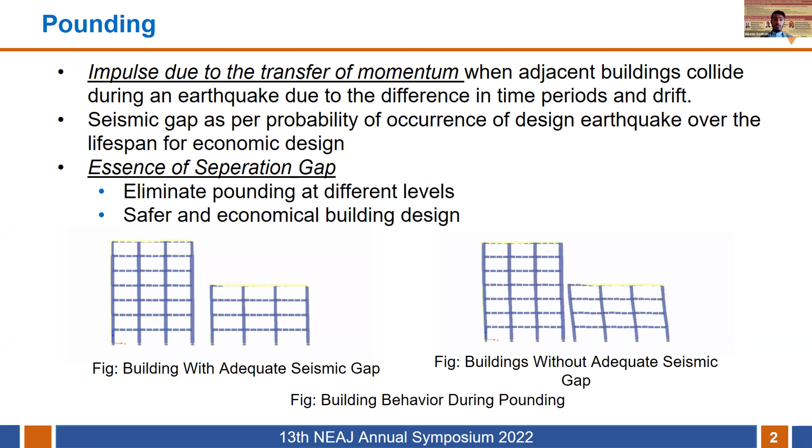On 25th April 2015, the Gorkha earthquake struck Nepal, especially damaging the central part of our country. Talking about the Kathmandu Valley, the basin amplification resulted in a higher time period, around 4.5 seconds along the east-west direction and 4.8 seconds in the north-south direction, especially damaging the tall or high-rise buildings, which are above 7 to 8 stories tall.

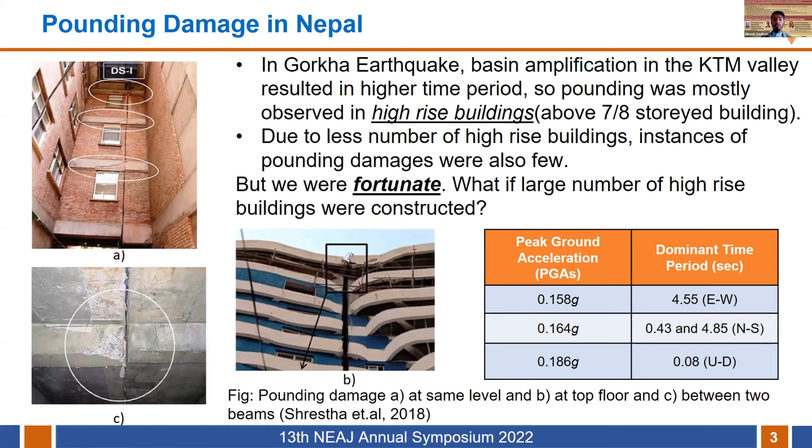But due to having fewer high-rise buildings in Nepal, the instances of pounding damage were also few. So you can say that we are fortunate in that case. But what if a large number of such buildings were constructed and a major earthquake struck? That could be a serious issue. Due to the lower damage of the Gorkha earthquake, it has further bolstered people's faith in existing building practices.

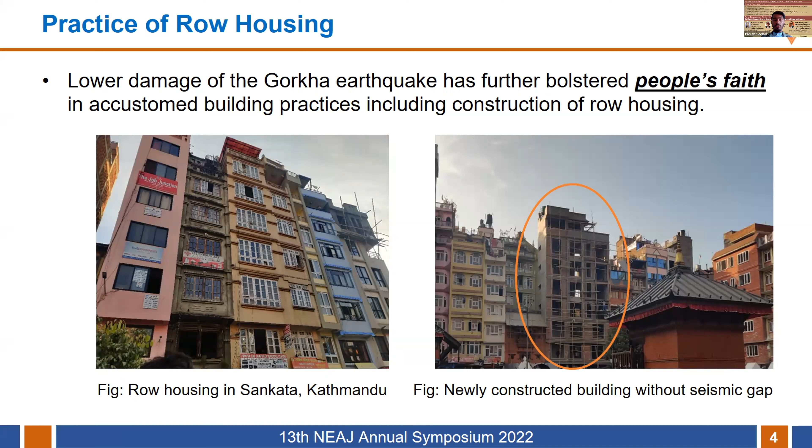Here in the figure, we can see that the row housing practices in Kathmandu Valley and even newly constructed buildings are not addressing seismic gap provisions in their construction. This may lead to severe damage and major consequences that we should consider. So the major question that arises is, will these row houses with such building practices in Nepal be able to sustain such damage should another occur?

To know the effects, we have selected 4 major earthquakes across the globe, including the Gorkha earthquake, whose PGA level varies from 0.177 for Gorkha earthquake to around 0.833 for Kobe earthquake. Taking these 4 major earthquakes, we are doing non-linear time history analysis, and the results will be presented in the further slides.

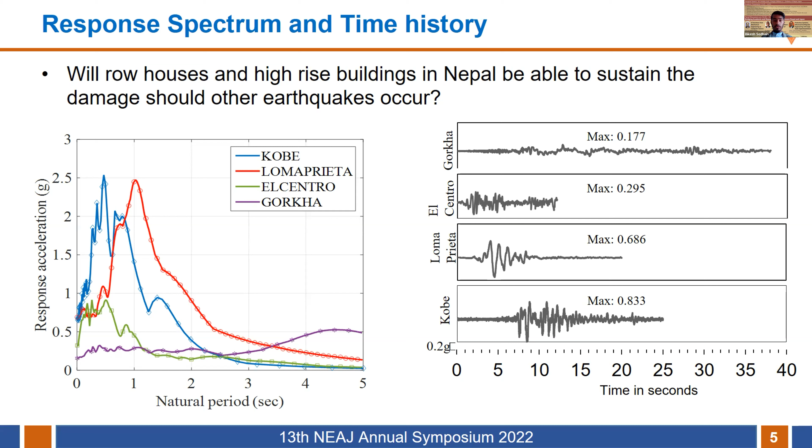Talking about the objectives, the major objective is to assess the pounding effects, for which we are evaluating the variation of link force with the separation gap of buildings, and we want to suggest the seismic gaps for zero pounding force for the considered earthquakes. The other objectives include evaluating the variation of seismic gap requirement with different PGA levels of the Gorkha earthquake, observing the story shear amplification caused by the Gorkha earthquake, and comparing the case-specific seismic gap requirement obtained from the analysis with the codal provision.

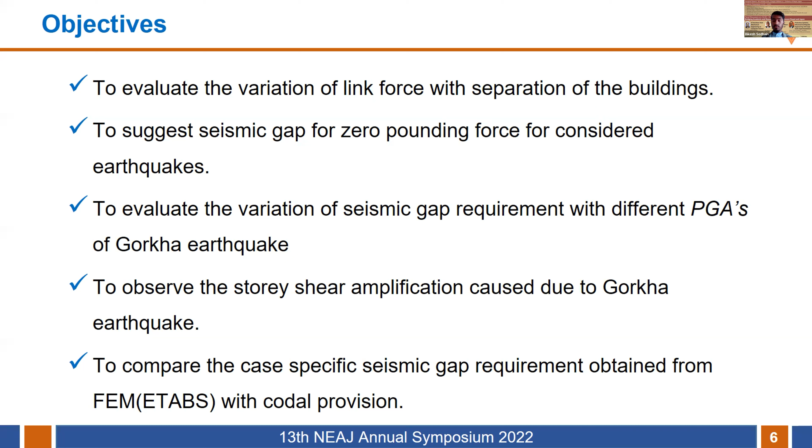To achieve these objectives, the general methodology we followed is as shown here. Through various literature review and site visits, we selected typical building models that best represent the building typology in the Kathmandu Valley, and we modeled the buildings in ETABS. After modeling, we assigned properties such as material nonlinearity and hinges, so that we could capture the real behavior of the structures, and we performed the nonlinear time history analysis. Finally, the results in terms of pounding force versus gap and shear amplification are presented, which we will discuss in further slides.

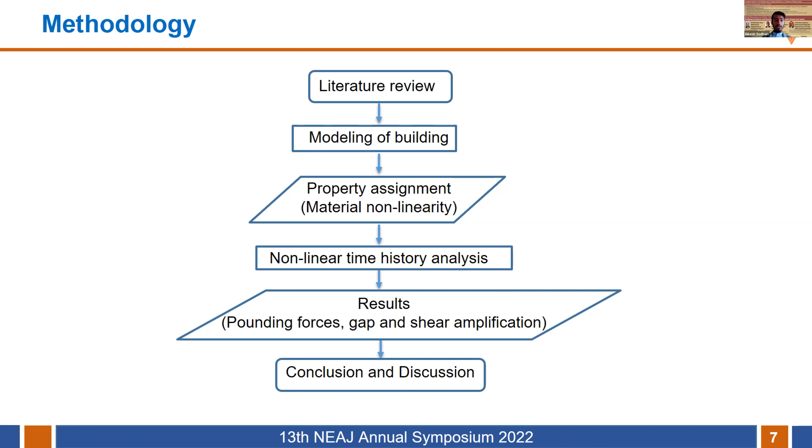Talking about the representative building models, in the figure we can see 2 building models. The left one is named B1 plan, which is 5 stories tall, and on the right we can see B2 plan, which is 7 stories tall. The story height is similar in both buildings, 3 meters, and the buildings are modeled and designed in ETABS following the codal provisions of IS code. The general structural dimensions of beam, column, and slab required to pass the building as per IS code are tabulated here.

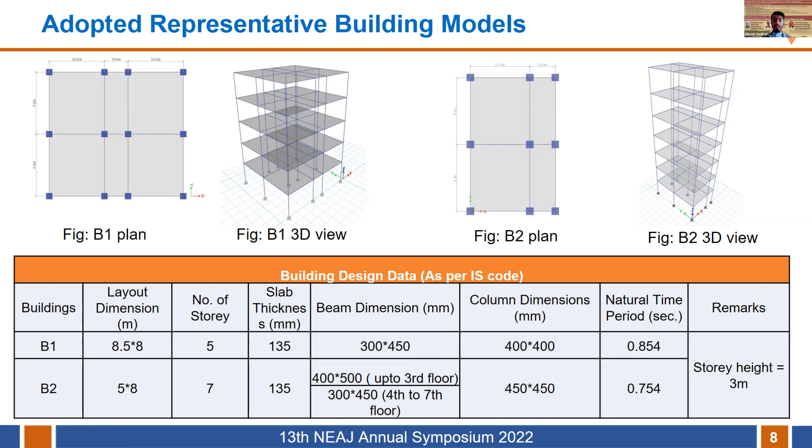Moving on to the next slide, we have material characterization. We used concrete of grade M30 with Mander's uniaxial material model, and to capture the energy dissipation, we used the Takeda hysteresis model for concrete. Similarly, steel rebars of 415 MPa are used with the kinematic hysteresis model. The frame elements in the model are line elements, and the shell or slab is a plane element.

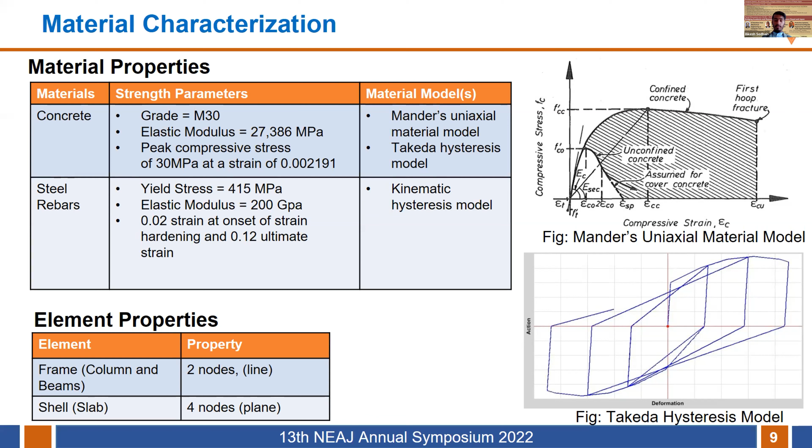And to capture the nonlinear effect of a building as a whole, we have assigned the fiber hinge model in the column of length 0.1 times the element length at both ends.

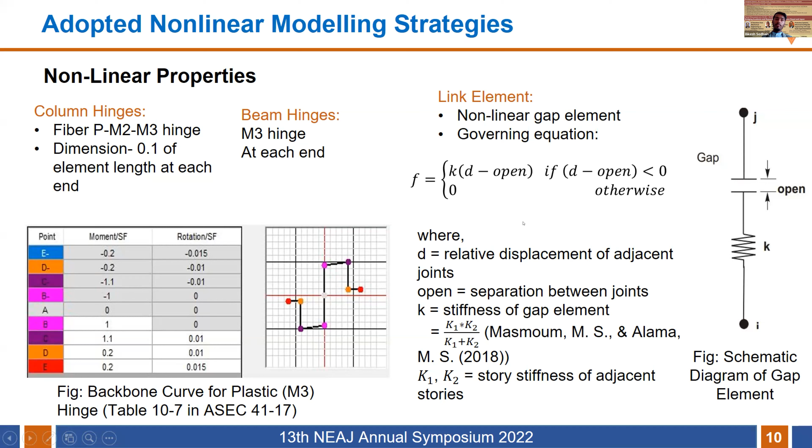Similarly, hinges were assigned in beams too, and to simulate the pounding force between the adjacent buildings, a non-linear gap element is used as a link element, for whose stiffness calculation we refer to the paper of Masmoum and Alama. Using these gap elements, we have simulated the pounding force between the adjacent buildings.

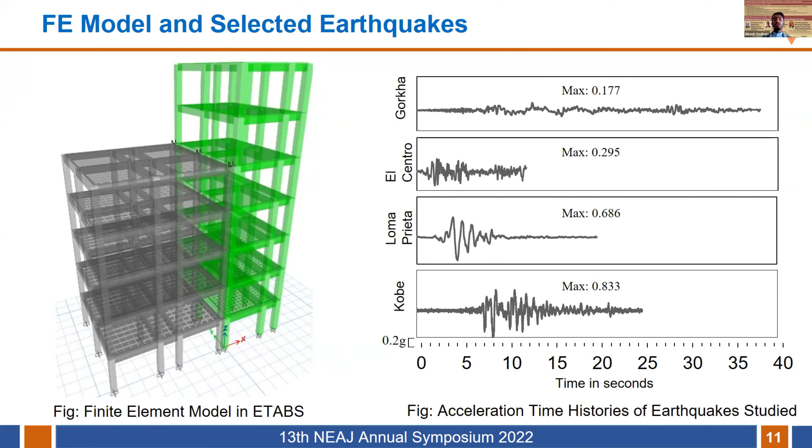Yes, and with these 4 time history graphs of the 4 major earthquakes, that's Gorkha, El Centro, Loma Prieta, and Kobe, we did a number of non-linear time history analyses on these models, and observed the results of pounding force versus gap and other shear amplification factors.

So talking about the results, here in the graph we have presented the link force versus gap provided, for which we can see that for the Gorkha earthquake, the minimum gap required is around 40 mm between the 2 adjacent buildings that we have selected, and the maximum pounding force generated is around 1200 kilonewton, which is at the top story level. Similarly, for El Centro, it is around 80 mm gap, and the maximum force generated is around 3500 kilonewton.

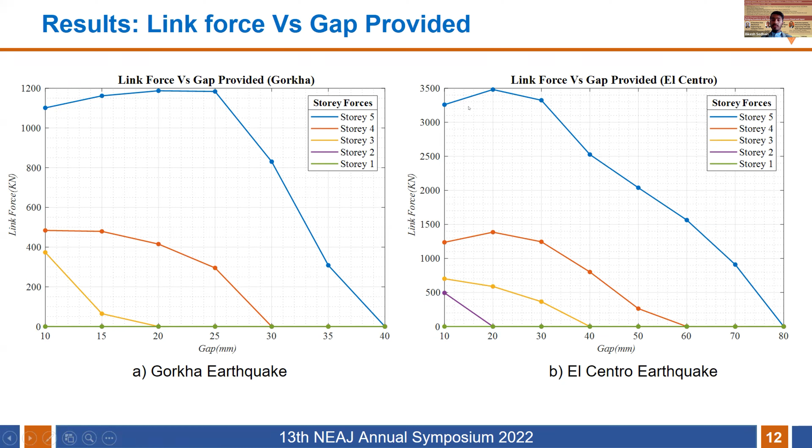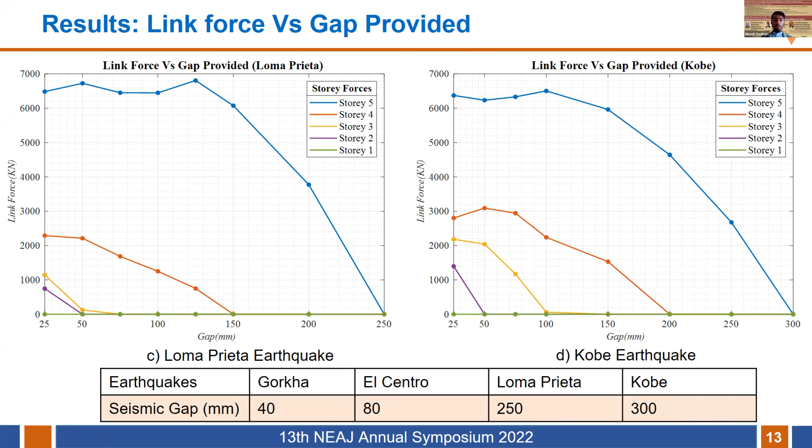Similarly, for Loma Prieta and Kobe earthquakes, which are higher PGA earthquakes, the maximum pounding force generated was around 6500 kilonewton in both, with a minimum gap requirement of 250 mm in Loma Prieta and 300 mm in Kobe. So we can see that the gap requirement ranges from 40 to 300 mm for the selected model for Gorkha and Kobe earthquakes.

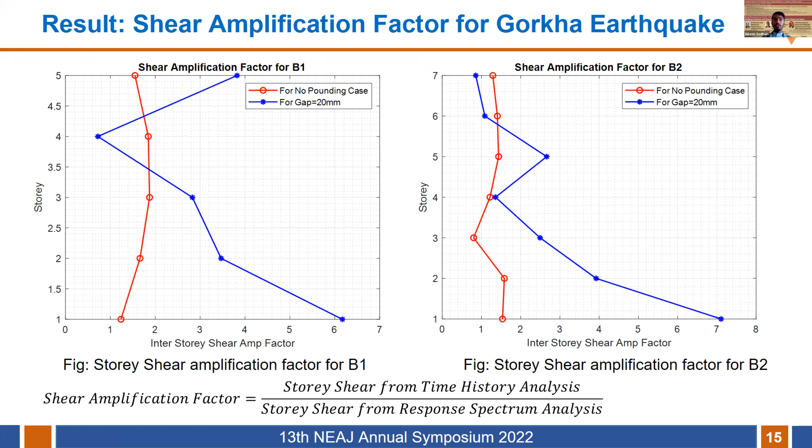And talking about the shear amplification factor for the Gorkha earthquake, the shear has been amplified highly, around 6 to 7 times in case of pounding, where we have used a gap of 20 mm, and in no pounding cases the shear is not so much at the story level. So we can say that due to pounding, the shear in the adjacent story level has been amplified.

And finally, talking about the conclusion and discussion, the codal provision, although it suffices the seismic gap requirement for the Gorkha and El Centro earthquakes, seems insufficient for the other 2 earthquakes, Loma Prieta and Kobe. So major earthquakes of higher PGA should also be taken into consideration for the codal provisions. Similarly, if you look into the story shear, it has been significantly amplified by pounding, making it necessary to control.

And to control the pounding between adjacent levels, if possible, we have to provide sufficient seismic gaps. If not, then we have to consider changing the design parameters, like making the building more stiff, so that the demand for the seismic gap is minimized. Through our study, we want to raise awareness on the severity of pounding damage that may result if the current rampant building practices continue. That means if the row housing building practice continues, it could lead to severe damage in building structures.

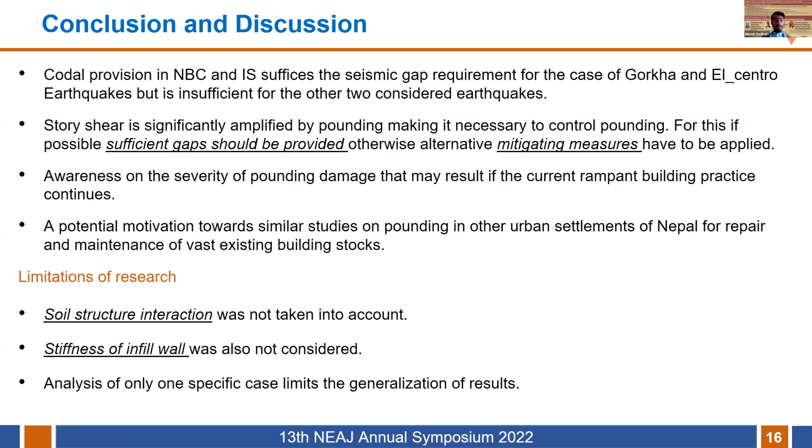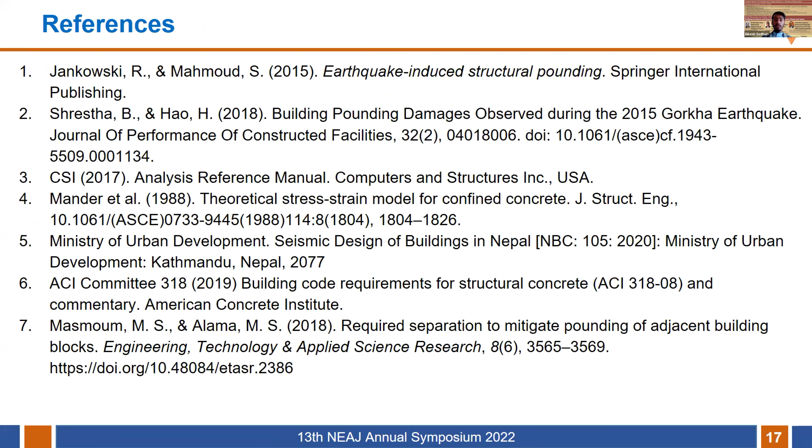So we hope for potential motivation towards similar studies on pounding in other settlements of Nepal and maintenance of the vast existing building stock. Although we tried to capture the real scenario, we also lack in some aspects, like soil structure interaction, which we have not taken into consideration, and similarly the stiffness of infill walls has also not been considered in our study. So this could be considered a limitation of our research. And finally, these are the general references that we looked into.